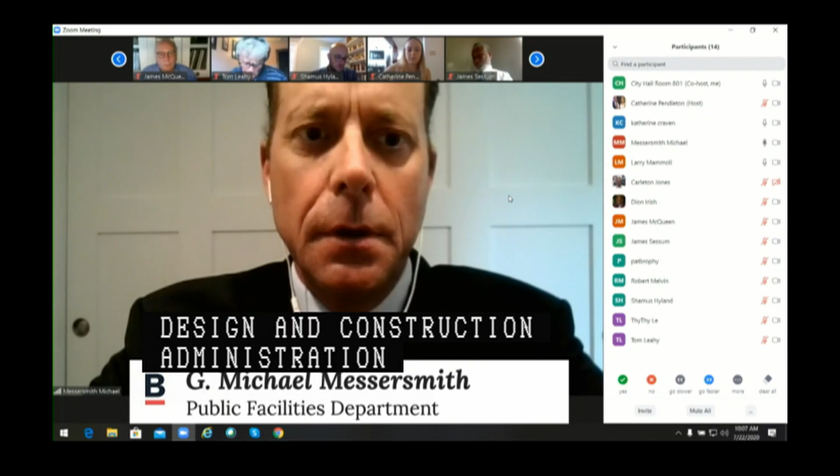Good morning, Commissioners. I'm here to request a vote for approval to award a professional design and construction administration services contract to Gale Associates for the Quincy Elementary School envelope project. The Public Facilities Department is managing the design and construction of the project, located at 885 Washington Street, Chinatown. PFD is working with Boston Public Schools to timely deliver design services for this project within 3 years of the contract's execution date. The scope of design services consists of roof, window, door, masonry repair, and asbestos abatement.

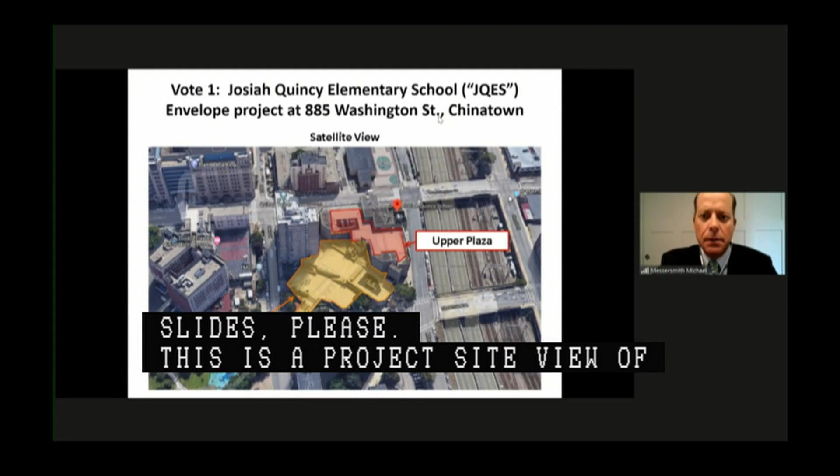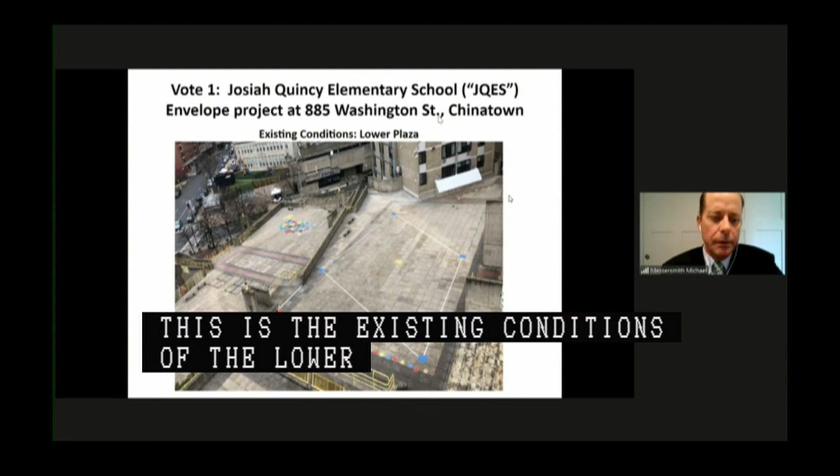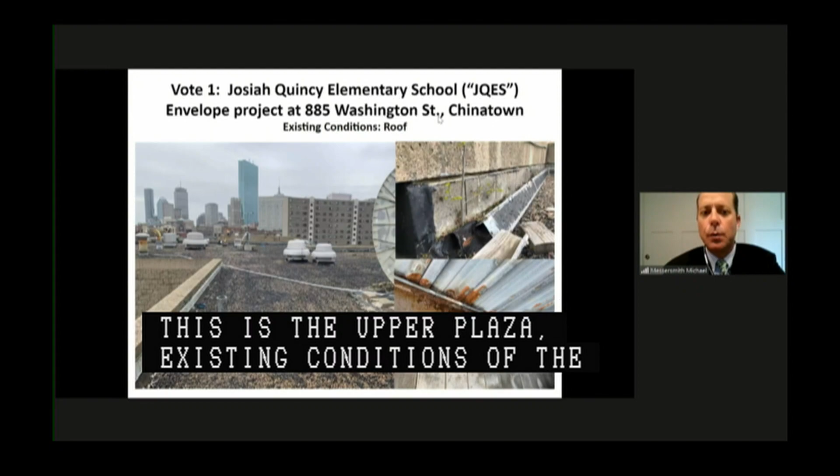When we go to the PowerPoint slides: this is a project site view of the school, showing the upper and lower plaza with Washington Street there. Next slide: this is the existing conditions of the rear elevations of the school. Next: this is the existing conditions of the lower plaza area, bird's eye view. Next: this is the upper plaza, existing conditions of the school. Next: this is the existing conditions of the roof.

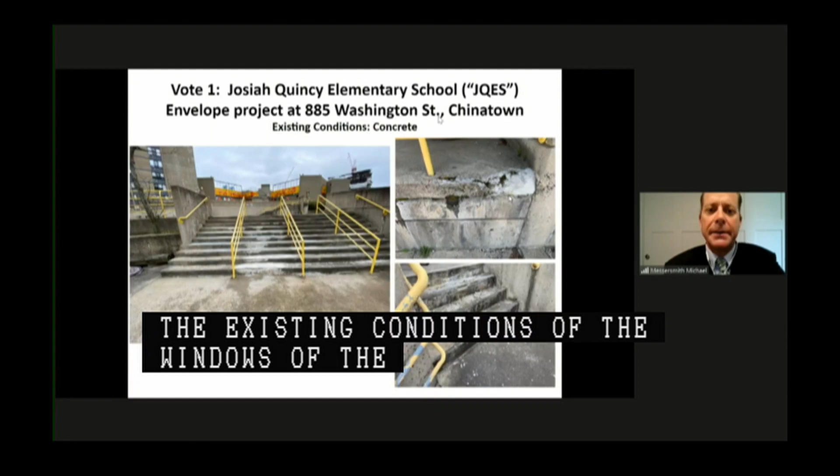This is the existing conditions of the exterior walls of the school. Next slide: the existing conditions of the windows of the building. And then this is the existing conditions, finally, of the concrete conditions of the school.

The city publicly advertised the professional design services through a request for qualifications process pursuant to Mass General Law, Chapter 7C. The advertisement was submitted to the city's Small Business Enterprise Office for distribution and notice on its listserv, and publication in the City Record and the Boston Globe on November 11th, 2019. Additionally, the advertisement appeared in the Massachusetts Secretary of State's Central Registry Weekly, posted on November 13th, 2019. In response to the RFQ, 8 firms submitted statements of qualifications for the project on December 10th, 2019.

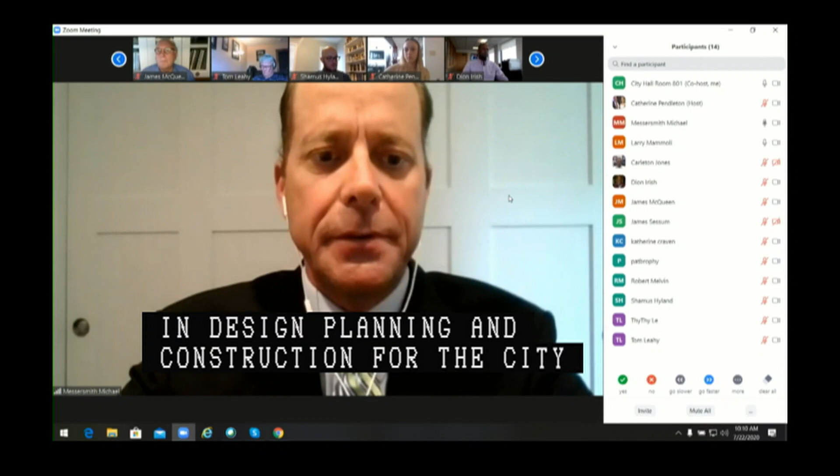A selection committee comprised of 4 people with experience in design, planning, and construction for the City of Boston Public Facilities Department and Boston Public Schools reviewed the qualifications for each firm on January 16th, 2020, using the defined criteria in the RFQ. On January 16th, 2020, 3 firms were shortlisted by the selection committee, and Gale Associates was recommended as the top design firm due to the team's experience with exterior envelopes under Mass General Law, Chapter 149, Public Construction Projects.

In addition, Gale Associates is a state-certified MBE firm. Also, Peer Consultants is a state-certified WBE and MBE firm, and will serve as a hazardous materials subconsultant to Gale Associates on this project. In accordance with the RFQ guidelines for the design fee calculations...

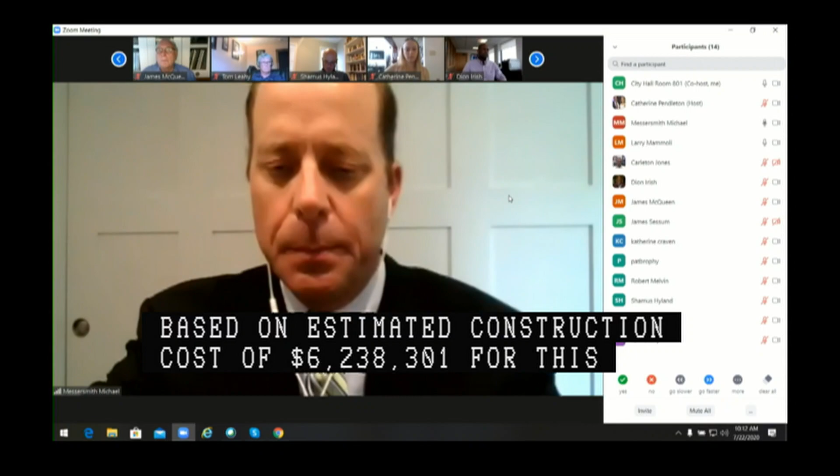PFD and Gale Associates negotiated a design fee not to exceed $464,998, including $50,000 for additional services. The design fee is based on an estimated construction cost of $6,238,301 for this project.

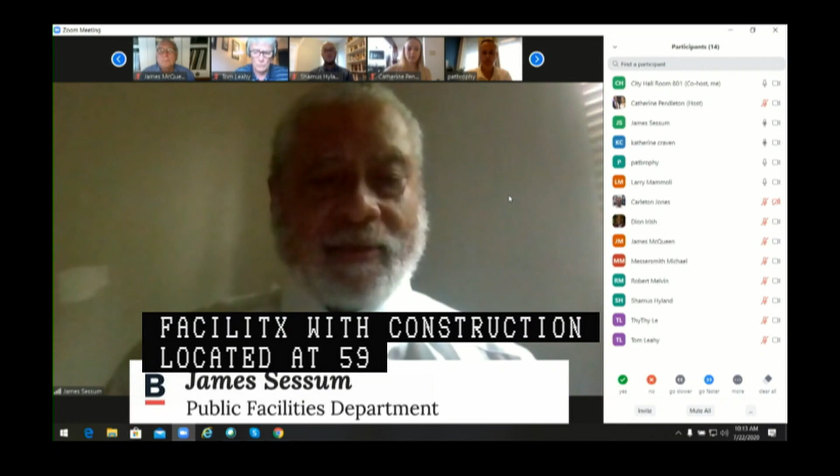The Public Facilities Department is managing the design and construction of the project, which is located at 59 Fenway in the Back Bay. In addition, PFD is working with the Boston Fire Department to timely deliver the design services for this project within 3 years of the contract's execution date.

Scope of services consists of exterior pointing, roof replacement, skylight replacement, and repairs to the rooftop masonry and antenna supports. May I direct your attention to the slides? They illustrate the work to be included in this project.

The first slide shows the front of the building as seen driving along the Fenway, near the corner of Westland. The second slide shows examples of the masonry that needs to be repointed.

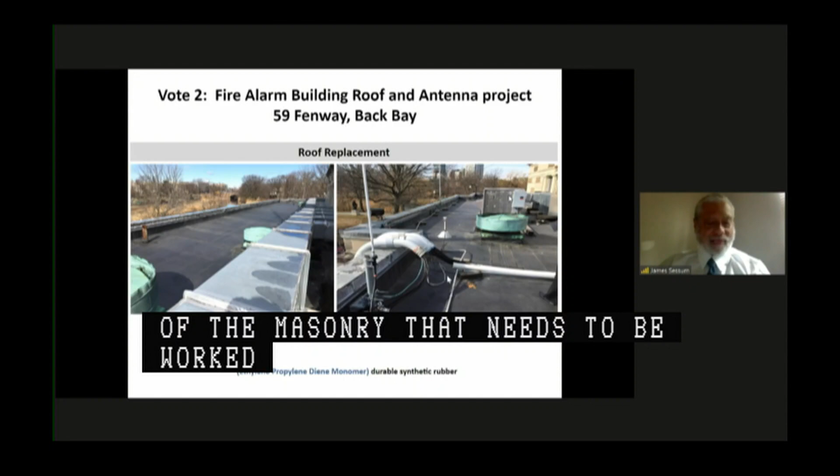The third slide displays roofing areas to be replaced. In the right-hand pane, notice some of the cabling that needs to be rerouted and properly encased.

You can further see in the fourth slide, the right-hand pane also shows masonry work, and notice the cables cascading down this side that need to be encased to create a weather-tight containment. To the left, you notice the existing skylights, and you can see they definitely need replacement -- the bubbling, the delamination of the seams, and the caulk.

Let me continue. That's all the slides. The city publicly advertised for professional design services through a request for qualifications, RFQ, process pursuant to Massachusetts General Law, Chapter 7C.

The advertisement was submitted to the city's small local business enterprise office for distribution and notice on its listserv, and for publication in the City Record and the Boston Globe, which took place on October 28th, 2019. Additionally, the advertisement appeared in the Massachusetts Secretary of State's Central Register weekly posting on October 30th, 2019.

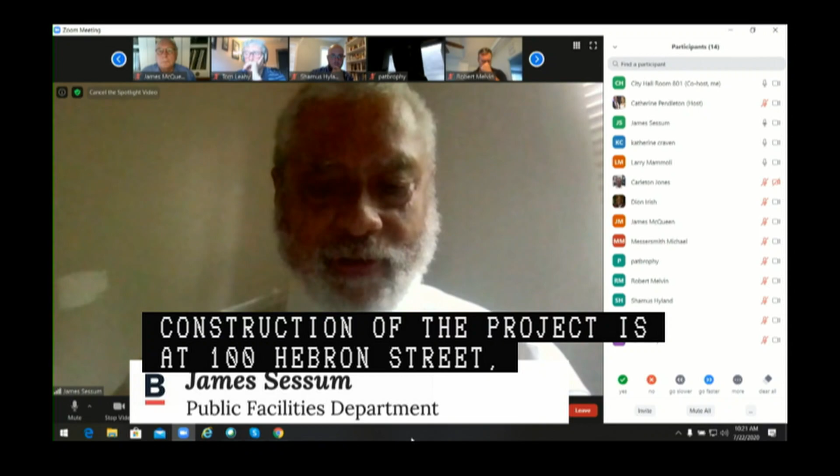By way of background, Studio E was retained to provide design and construction administrative services for the project, which consists of various updates to the lobby, gymnasium, computer lab, and other miscellaneous areas. The work also includes lighting upgrades, painting, and installation of gym wall pads and furnishing. The reason for this amendment vote request is to increase the design services fee and to extend the contract expiration date to July 31st, 2021. This increase became necessary due to requests from the community and the school to utilize the multi-purpose room and to convert the kitchenette into an additional office space.

These options were included in the original scope as miscellaneous areas. Also, there's the need to have an accessible toilet room to comply with current code, and there was discovery of asbestos-containing tiles throughout the building.

To further explain, may I direct your attention to the slides, which will show what's existing as well as what's proposed in this construction. The first slide shows the existing view of the lobby. The right-hand picture is looking as you walk in through the door—this is what you see. The left hand is if you turn around and look back at the entrance. You can see that the entrance is very dark and you can't even see outside.

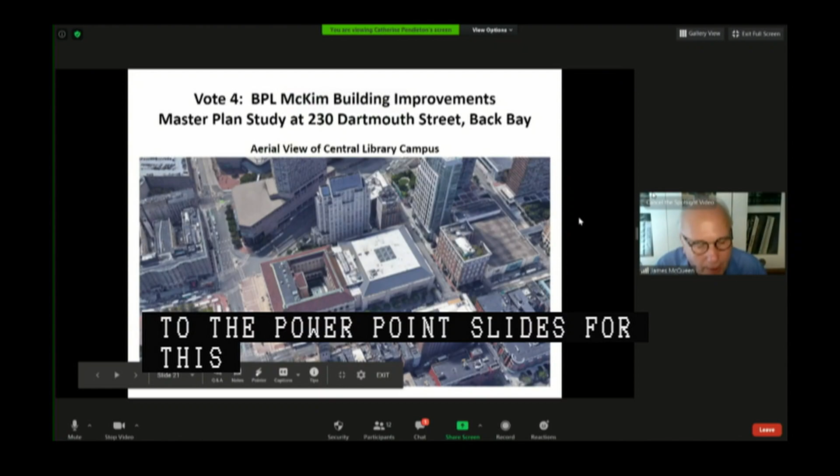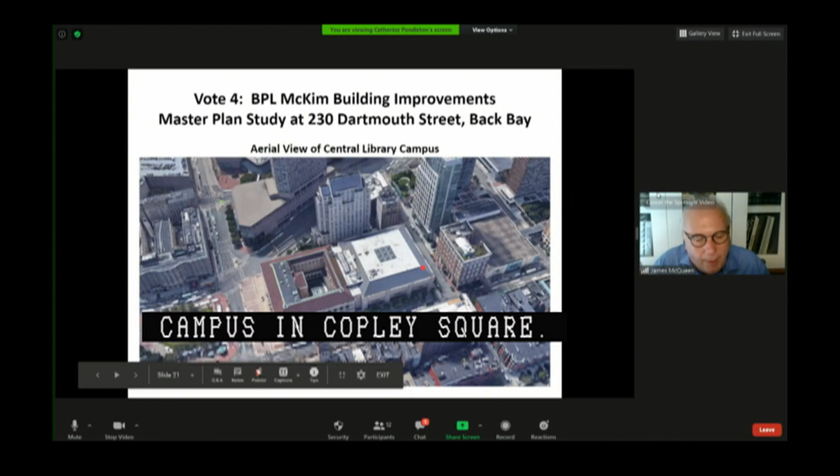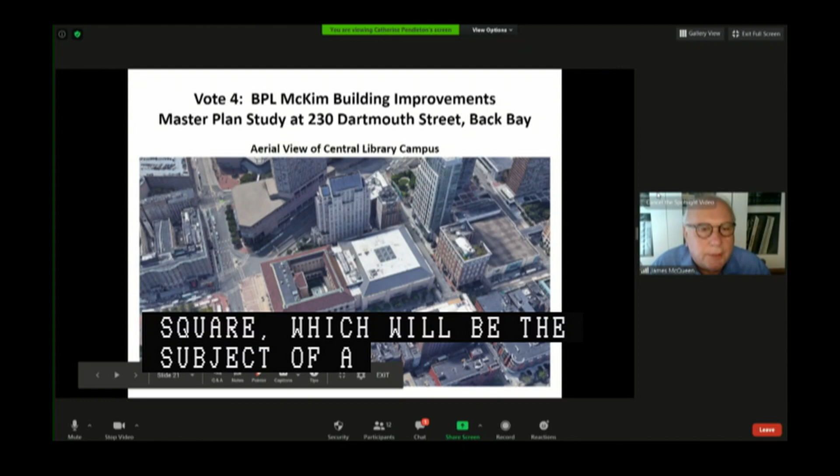If I may direct your attention to the PowerPoint slides for this project. This first slide depicts an aerial view of the Central Library campus in Copley Square. The McKim Building is to the left, and the recently renovated Johnson Building is to the right. Also off to the left is Copley Square, which will be the subject of a separate Parks Department design study, which we anticipate coordinating with.

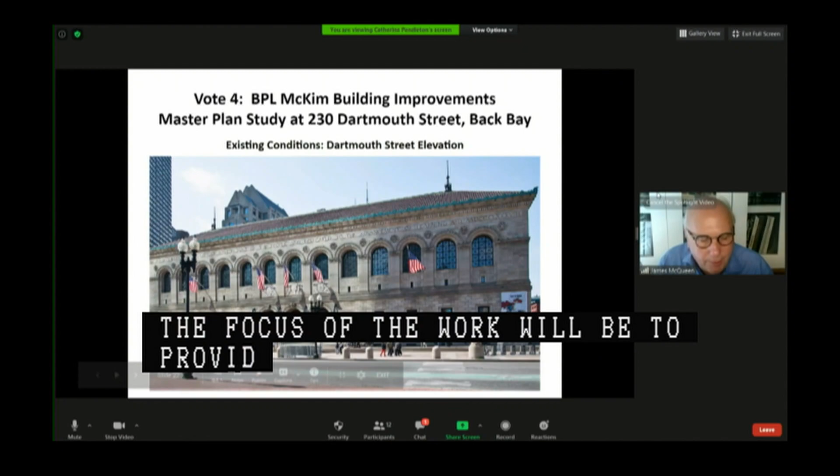The second slide shows the existing Dartmouth Street facade. The focus of the work here will be to provide options for an accessible entrance, as well as the best means to engage the public and activate the public plaza in front of the building. Additionally, as noted before, we anticipate coordinating with the Parks Department to integrate our design with theirs.

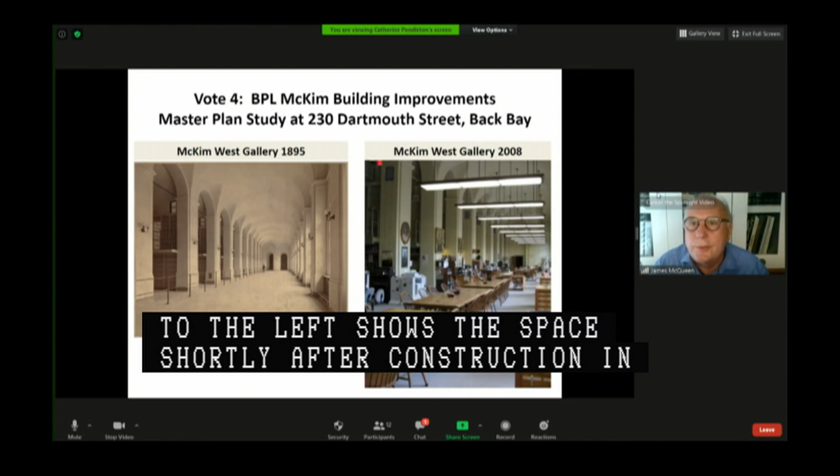The third slide shows the West Gallery on the third floor of the library. The slide to the left shows the space shortly after construction in 1895. The slide to the right shows the space as it was in 2008, shortly before it was closed to the public. This is just one of the areas that we'll be addressing in the study.

The work will focus on renovating and reopening the third floor, formerly the home of the special collections, to best identify the best uses for these areas and to make the fine arts and music, prints, photography, architecture, and architectural archive collections accessible to the public. Additionally, we want to better engage the public and support the library's mission.

The city publicly advertised for professional design services through a request for qualifications process pursuant to Mass General Laws Chapter 7C. The advertisement was submitted to the city's Small Local Business Enterprise Office for distribution and notice on its listserv, and for publication in the City Record and the Boston Globe on January 20th, 2020. Additionally, the advertisement appeared in the Massachusetts Secretary of State Central Register weekly posting on January 22nd, 2020.

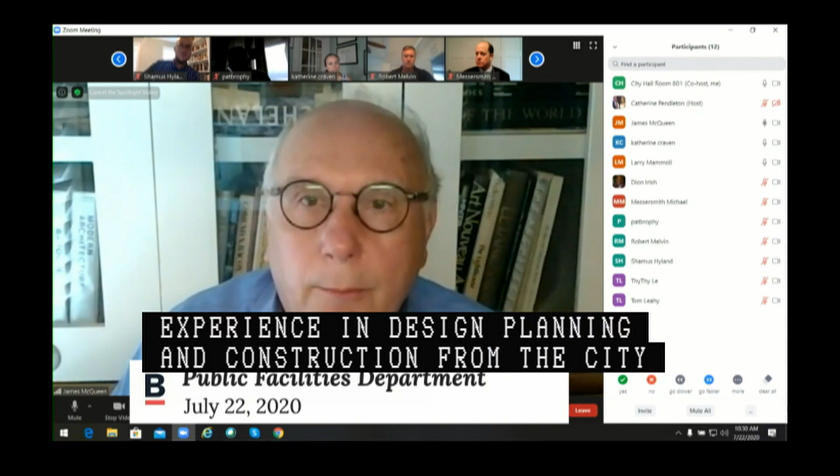In response to the RFQ, 15 firms submitted statements of qualifications for the project on February 27th, 2020. The selection committee, comprised of 6 people with experience in design, planning, and construction from the City of Boston Public Facilities Department and the Boston Public Library, reviewed the qualifications of each firm on March 11th, 2020, using the defined criteria in the RFQ.

On March 11th, 2020, 4 firms were shortlisted by the selection committee and invited to be interviewed. Because of the subsequent COVID-19 closure of city offices, the interview process was delayed until April 29th, 2020, when the 4 firms were interviewed through a publicly advertised Zoom meeting.

Shepley, Bulfinch, Richardson, and Abbott was recommended as the top design firm due to the team's experience with significant library projects, historic renovations, and Chapter 149 public construction projects. In addition, Shepley, Bulfinch, Richardson, and Abbott is a state-certified women-owned business enterprise, and their civil engineering subconsultant, Nitsch Engineering, is also a state-certified women business enterprise.

In accordance with the RFQ guidelines for design fee calculations, PFD and Shepley, Bulfinch, Richardson, and Abbott negotiated a design fee of $640,000. In conclusion, I am seeking the Public Facilities Commission's approval to award a study contract to Shepley, Bulfinch, Richardson, and Abbott Incorporated. I'm here to answer any questions you may have. Thank you for your time and consideration.